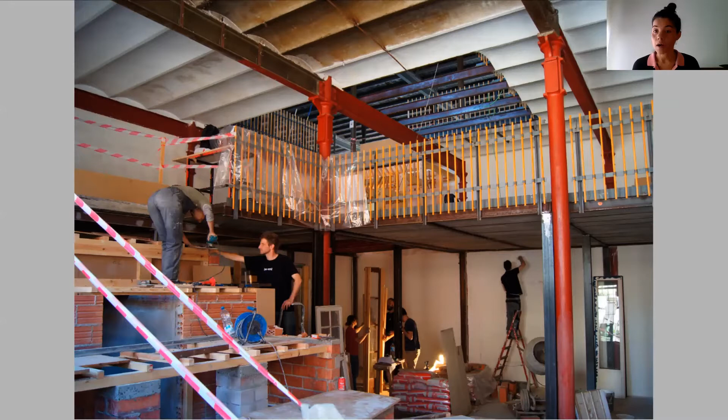So we, as part of the neighborhood, started transforming the different blocks. Can Batlló is basically a paradigmatic experience of bottom-up city transformation, where people with their hands, the materials around, the skills, self-built, in a way, communitary facilities, and started inhabiting these spaces with cultural activities, with a library and a kind of cafe and meeting point at the beginning.

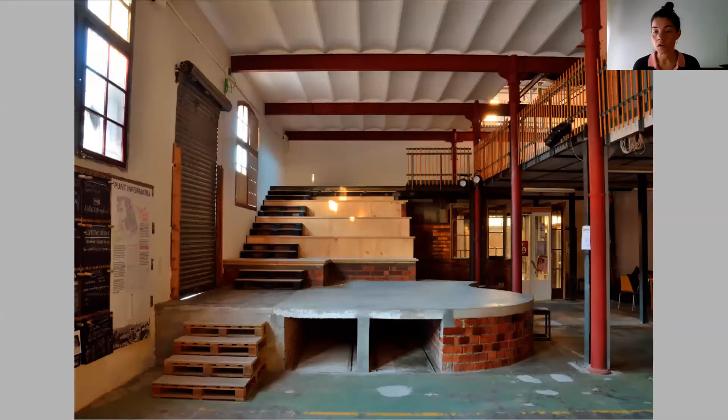So Can Batlló was for us a kind of starting point to understand how we can relate our practice with people, with participation. Can Batlló started to be transformed in 2011, with all the people using the spaces. From this first space, block 11, the activities continued inside the different blocks with agreement of the municipality, also outside with different kinds of public spaces.

But at a certain moment, we realized that we had so many people involved in Can Batlló. We had the skills from people who had been involved in different things, from carpentry to steel, etc., and also as architects. So it was a kind of combination of knowledge that made it easy to start thinking how to scale up these kinds of initiatives.

In that moment, we thought about how Can Batlló could become a real piece of the city, needing the complexity of users. In 2012, one year later, as an assembly of Can Batlló, we started to think how we can provide economical activities, how we can provide housing, because we were also in the middle of this crisis where housing was one of the main points. So from the assembly, different groups of people started to think up projects. One of them was an incubator of social economy, so how we can introduce new activities, like productive activities, again, in these industrial premises.

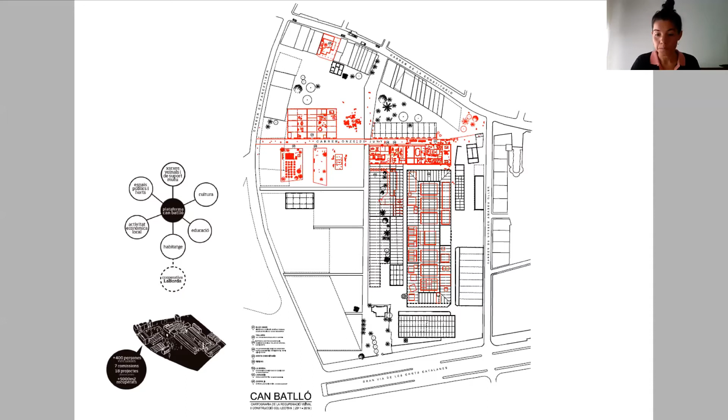So in this context, I think it's important to understand what is happening in Barcelona. Since the dictatorship in Spain, the main housing form, the housing tenancy that was promoted, was ownership.

It was also a way to control the society, to make it more conservative, and also to promote the economy related to construction.

That's why many years ago, where we are now, Barcelona is the city with the highest percentage of rent, but it's in any way also really low. So Barcelona has 65% ownership and 35% other kinds of tenancies, especially rent.

But the main point is that only 2% of the housing stock is public. So that means the private market has total control, and that's why there are no mechanisms to control the prices.

Before 2008, before the crisis, the prices started to grow and increase extremely, and just two years ago we were again in another bubble.

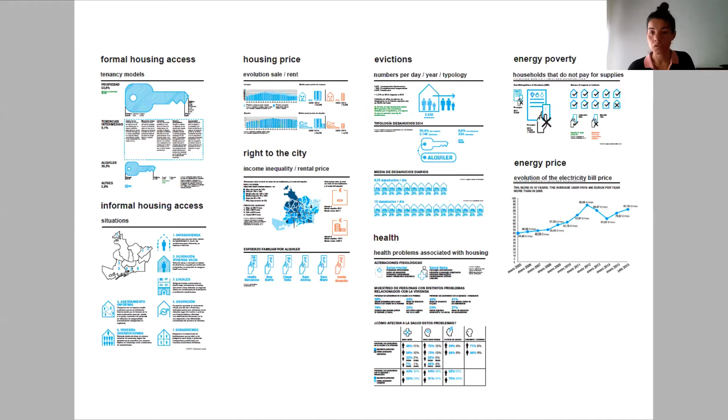In that sense, what we understood as cooperative housing is basically a model we saw in preliminary studies from Uruguay, for example, or even Denmark. We also know it's present in Canada, the States, other South American countries, Germany, probably Australia. So in a way, it's a model which is not really known, but it's present in different countries all over the world.

Our framework was defined basically as a non-speculative model, which helps to define this blocked housing stock, which cannot be absorbed by the real estate market and cannot increase the monthly cost. So it's collectively owned, and this is the mechanism that also locks out speculation.

Because it's a non-profit model, it's affordable monthly quotes, because you don't have to produce benefit itself. Basically this model wants to cover the cost of construction, the cost of maintenance, and to produce a kind of solidarity box, but that's all.

Basically the cooperative is the owner of the building, and the cooperative establishes a contract of right of use to the individuals who are going to live in each of the units, in each of the housing. And you are able to live in the cooperative for your entire life.

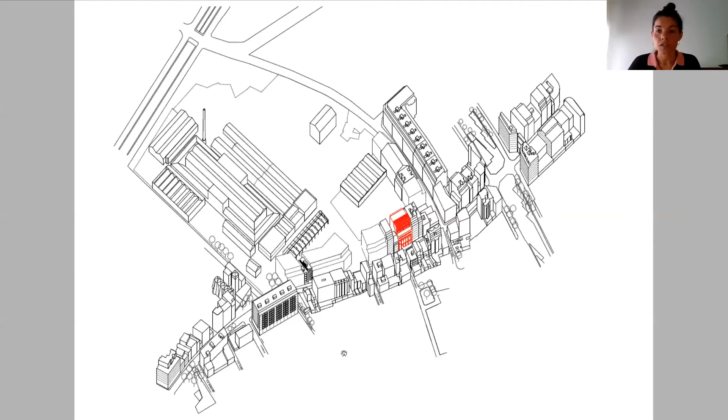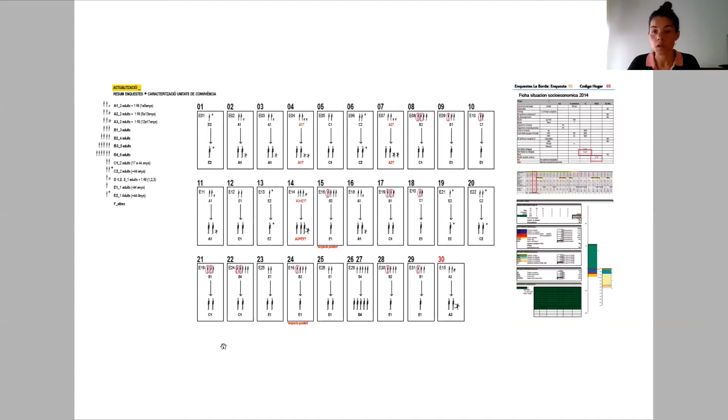So the first phase of the project was interviewing all the people who were in the assembly. We made this kind of survey, this interview, to really know the profile of the people. This was through asking about the family structure, the incomes, the mobility dynamics, about their current housing access, also about energy demand and energy consumption.

A lot of information also allowed people to be really aware about where they were living, how they were living, the cost of living, and also about energy poverty. Some of them were in energy poverty without knowing it. So in a way, the process of definition is also a process of empowerment and acknowledgement.

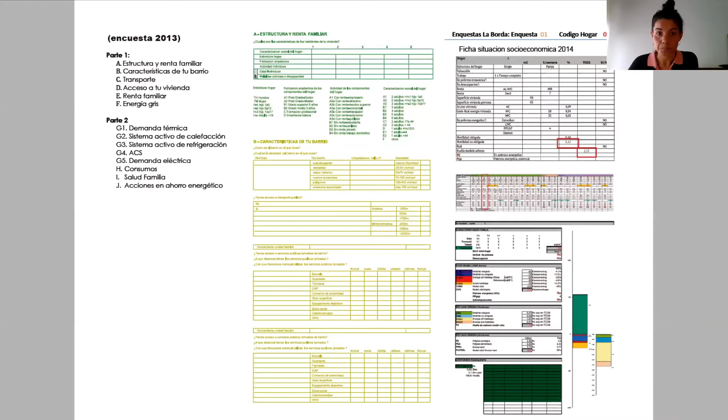So here was a kind of radiography of the group, basically we selected some of the main outcomes. On one hand, we had a really diverse composition of the group, which is also a mirror of society. This idea of the conventional family prototype with 2 adults and 2 kids, for example, is not present at all anymore in Barcelona or even in the group.

There were a lot of single people, which also shows we are more atomized, more individualized as a society. There are more couples, mothers or fathers with kids, and also units of cohabitation, meaning different adults living together. That makes us realize we need a really flexible infrastructure and different typologies of housing.

On the other hand, almost 50% of the people in their previous houses were paying a lot, more than 50% of their incomes, through housing. So the idea of reducing the cost of construction, to make La Borda more affordable, was essential, and making it really passive to understand how we can reduce the energy consumption.

Because in their previous houses they were suffering energy poverty, as they had to pay so much for the house that they could not assume the heating system, for example. And the last was about mobility. In Barcelona it was compulsory to build parking, which we were also challenging in this regulation.

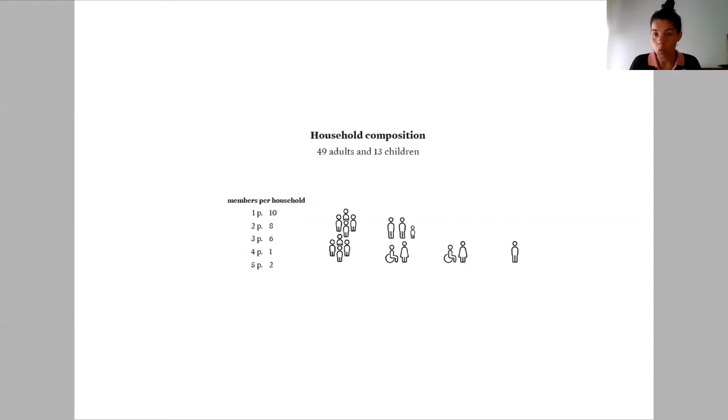From 10 units, some are from 1 person, some from 2 people. We can see like only 1 unit is a kind of conventional family of 4 people, like 2 adults and 2 kids. So in this idea, diversity is really present.

One of the main goals of La Borda was also to enhance community living. So how can we, in a way, rethink the program of collective housing? We understood that we cannot reduce the number of units, so we have to redefine what we can take out from the units and make it common.

Finally, we had 280 square meters of community areas, which is more or less 10 square meters per unit. Basically, this came as a process of understanding which kind of social dynamics we were to make common.

How daily practices can be a radical tool for social transformation, taking into account, for example, gender issues, how a collective kitchen can promote an equal share of household tasks, for example the kitchen tasks. Reflections and discussions like that were really present.

So in a way, we started thinking about the different kinds of activities we realize at home, which means a home is more than a shelter - a series of spaces to care for the body, just for storage, etc. As a community, which is our conviviality model, we asked what we want to share: the energy supply, the mobility, the economy, healthcare.

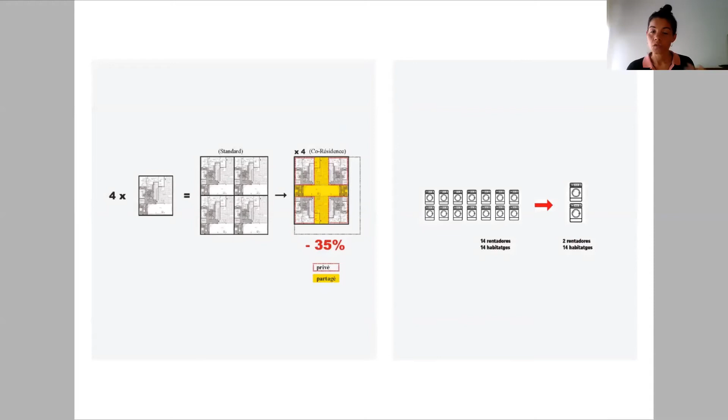So also, for us, it was a response to be more sustainable in terms of environmental aspects. This idea to reduce the surface of construction, to collectivize infrastructure, to decide which are the needs - where they're going to be developed through this participatory process.

Finally, we managed to decide that we had this kitchen and dining room, the co-working - more than a co-working, it's a commercial area which is a cooperative for consuming vegetables and organic food, etc. A multi-purpose room, the laundry, a guest room, a health area, and outdoor or semi-outdoor spaces like a courtyard, bike parking, terraces, storage.

As I said, we proposed to the municipality to change the regulations, and I think this was a victory - that through this kind of process we can challenge the current regulations and provide frameworks for other developments to be built with these new regulations.

We collectively decided the environmental goals - how we can reduce energy consumption, water, materials - as much as possible within our budget, which was already quite low.

Basically, the project was placed in between these two existing buildings, with a south facade, which is the best facade in our context to capture the sun, to get the sun's energy as much as possible.

This internal courtyard is a kind of space for the community to meet, to see, to circulate, and to enhance interaction. It also functions as a collective energy saving strategy—through a greenhouse it keeps the sun's energy inside and makes the whole volume more compact, reducing the external facades which are more exposed to the climate, to the rain, etc.

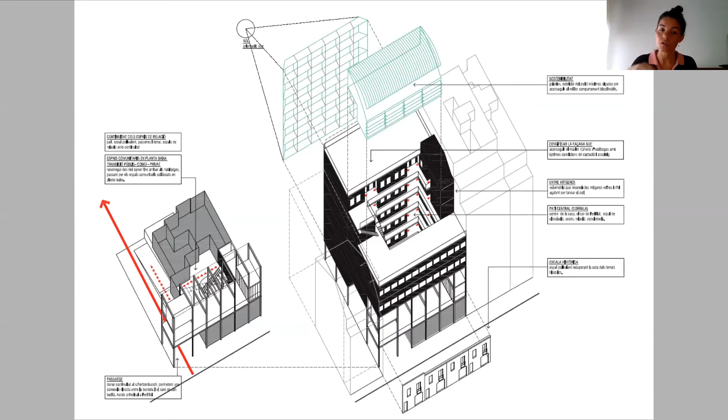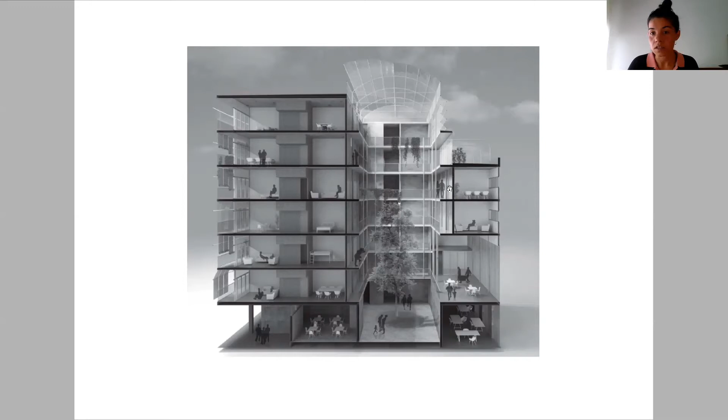So these transitions and spaces of interaction and the passive strategies were the most important in the design—making this dense block on the south facade, this courtyard in the middle which also keeps the energy, and finally the ground floor with the common areas and only 4 units on the north facade, but in the highest spaces.

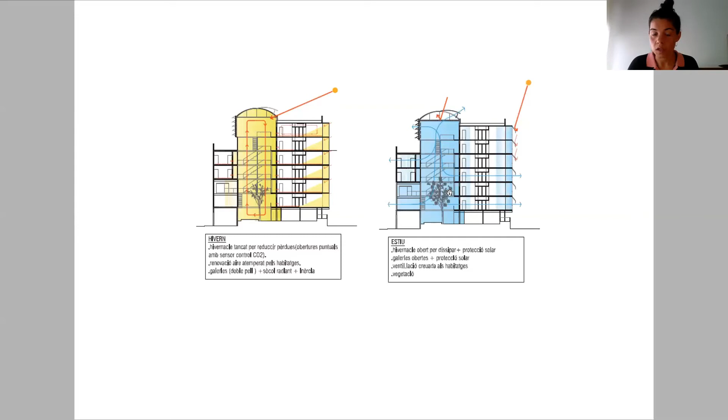Here is the behavior in summer and in winter, with the greenhouse closed or open, with cross ventilation. And this is the different workshops used to define the housing typologies.

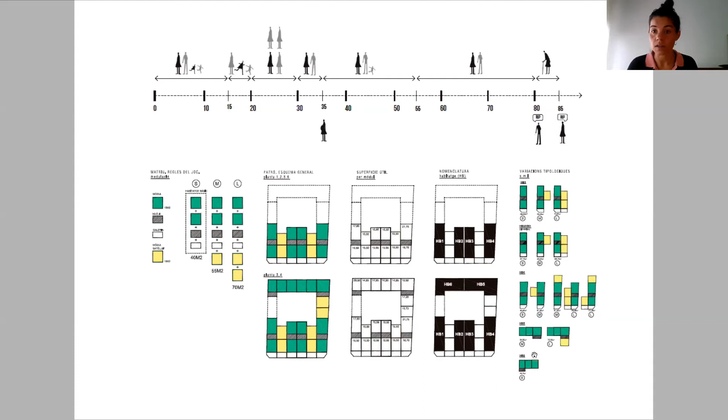After understanding each of the needs, basically we defined a kind of open infrastructure of rooms, of units that can be changed through the life span of the cooperative and the units, and can be connected, having several typologies for different unit compositions.

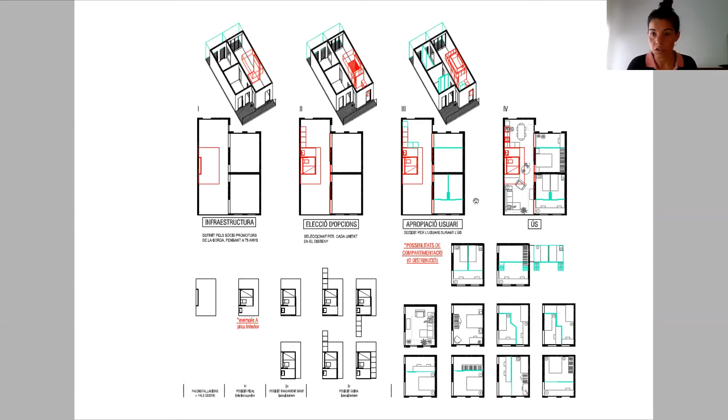This was also developed in terms of participation with an infrastructure that is kind of naked, where each unit can define the kitchen and the position of the access to the bathroom, and then during the living they can build different kinds of divisions and internal partitions to adjust their needs. So this was also participation just to define it.

And once everyone was distributed in the building, we had this kind of image of a puzzle—different kinds of compositions and typologies in each of the floor plans.

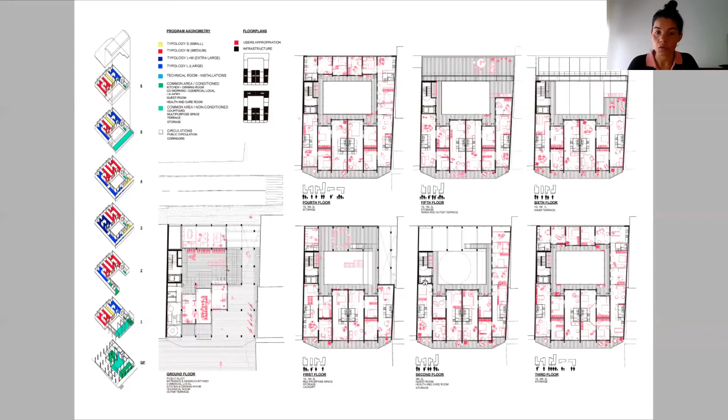So this is the ground floor with this public passage connecting from the neighborhood to the park, the kitchen in the ground floor, and this kind of commercial activity place.

And here we can see how this courtyard with the circulations and common areas, kind of the lobby, is combined with the units, and how each unit functions differently because it's a really open space with no hierarchy, allowing people to live in these spaces very differently.

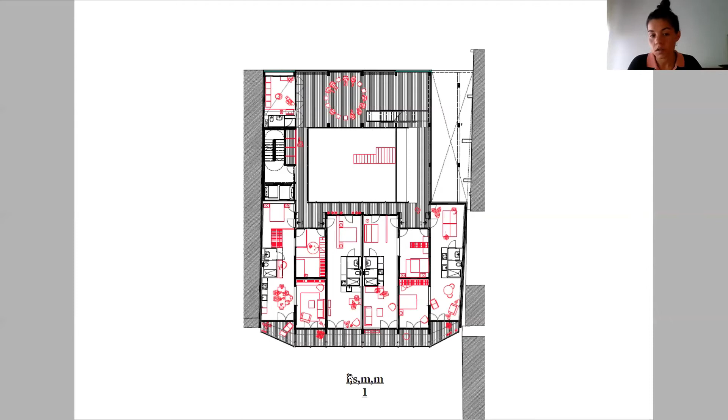For example, in this first floor we have an L unit, the biggest one, a small one, and 2 medium sizes—but this composition changes across the different floors.

And just to finish about the design decisions regarding environmental impact, it was important for the cooperative to also be a pioneer in terms of materiality. After studying different scenarios, we decided collectively to build in wood—CLT, cross-laminated timber—which was the most sustainable material.

And although it was somewhat expensive, we managed with a low budget because we could reduce the layerings and reduce the insulation, etc. So basically we had the ground floor in concrete, and all the distributions in the houses were already in the structure—so in a way, the main infrastructure was already defined by the structure itself.

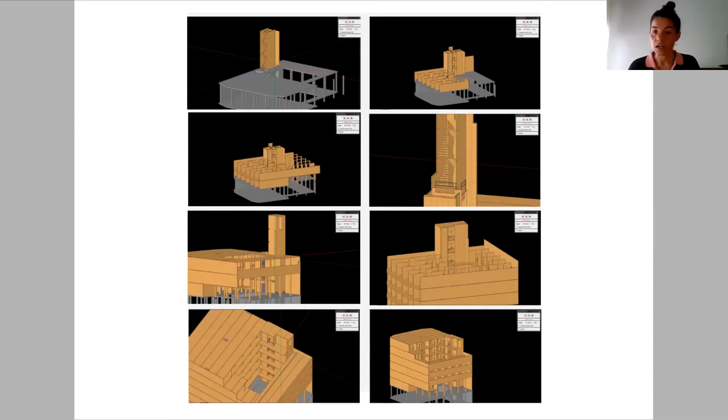As we can see here, in 6 weeks we already built this six-floor building, and the main infrastructure was totally linked to the structure.

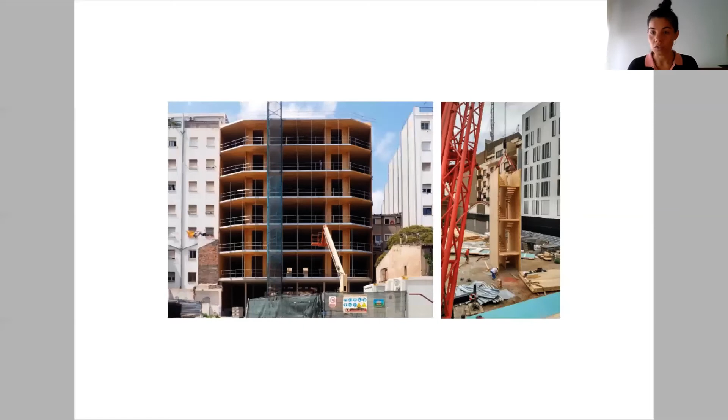Also during the construction, people were visiting the building to really understand how it was going to be built, which was also important for the future maintenance of it, the different kinds of layerings.

We also introduced a bit of self-construction, self-build, in order to reduce the budget, but also to use the waste of the structure to build one of the floors from the ground floor.

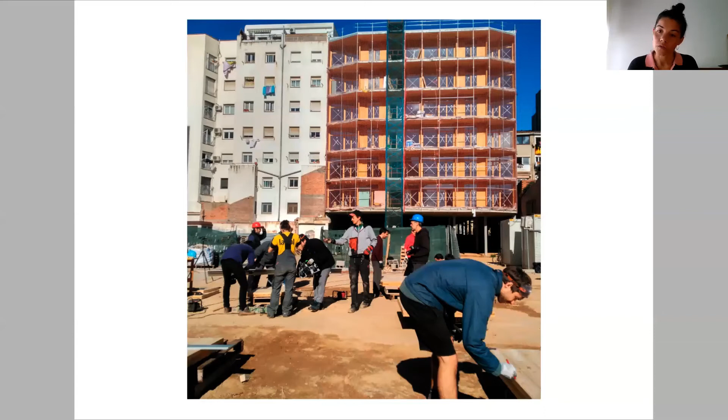So here are some pictures with the building already finished. And I will start, just really briefly, the last 2 blocks.

These are images from this appropriation—it was a really naked infrastructure because of the budget. It's difficult to understand sometimes in different countries with different construction rates, but basically we built at 850 euros per square meter, which for a passive, highly environmentally performant building in wood structure is really, really low.

So basically this was because we prioritized the main infrastructure, like the facades, the quality of the windows, etc., and the installations, but the rest was totally unfinished.

So the people took a really important role to define and to appropriate it. So even today, the laundry is still to build as a box, but the users started. The walls were painted by the people. The units, in a way, were partly finished by the users in order to make it more their own. So this was the main infrastructure.

So on these walls of wood, these spaces just connected to make different uses for the people, and then to see how people are customizing their own flats, making each one really different from another. It was also really beautiful to see how all these infrastructures were used, especially for the kids, and how people feel really comfortable using all the common areas of the building. Each point, each corner was totally used by the people.

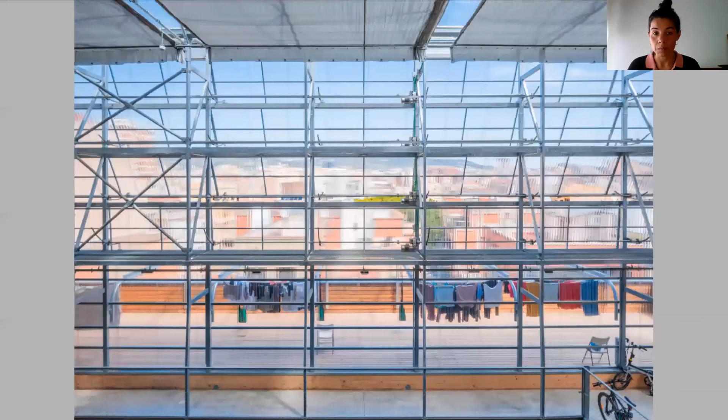And here we can see how the flowers are starting to colonize the different spaces. Gatherings and different meetings were happening, showing how these non-hierarchical spaces, these really open spaces, allow many different activities to be developed.

And the rear facade, the south facade, also with this sun protection, which changed a lot the depth of the facade, and this ground floor with the passage and the shop already open, and how life is seen through this polycarbonate.

And just to finish, I'll have 5 more minutes maybe. I think it's more or less what we said. It's important to understand how many of the decisions we took during the process had in mind that we had the people deciding with us, and that we were also able to monitor and make a lot of pedagogy about the environment, about the behavior of the building.

And in that sense, once the people moved there, we did many workshops on how to use the building, because a really passive building needs a really active inhabitant. So we explained the different mechanisms, how during summer or winter they had to move the sun protections, activate the ventilation or microventilation of the windows, the heating system, etc.

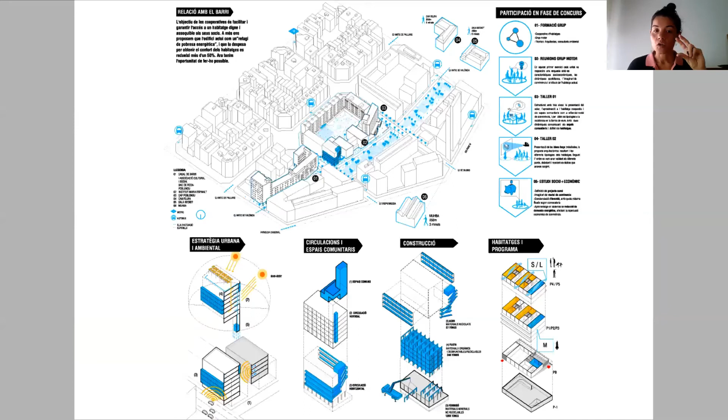So we had the opportunity to work with a group, and we won the competition for one of the plots, and we started this process of revising and redefining it in a second way with a second group on a second plot. But it was interesting because many of the main strategies about environmental issues, how the surroundings affect the building, were really present, and we could readjust some points from the previous infrastructure, while also having really open spaces in this second project.

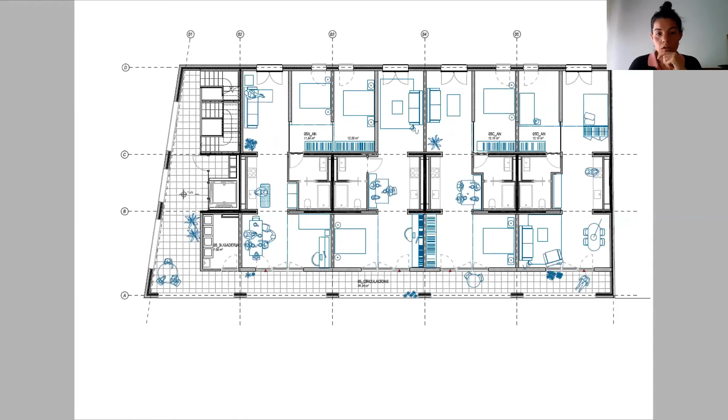And we also took into account what we learned about the wood structure, about many of the collective devices that we introduced in La Borda, in this new space. This is a really small block where we wanted, but we didn't have, for example, a courtyard.

So basically we took outside all the spaces of circulation, all the spaces of interaction, and we put them as terraces, all the circulations and collective spaces in the corner of the building to make it more visible. And here we can see how all this public space, these public parts of the building, are really public and visible.

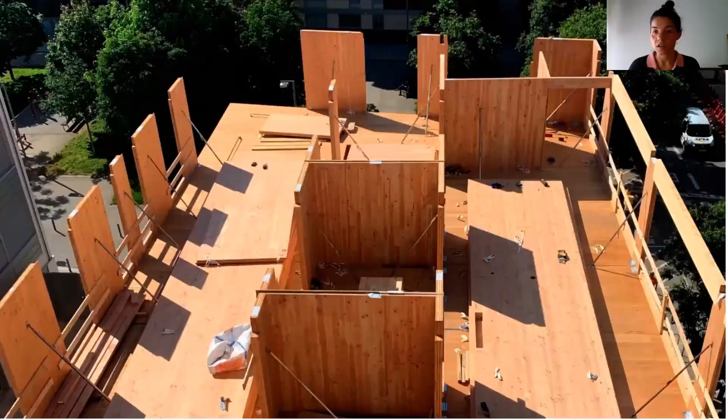Also, this kind of infrastructure where the wood is defining the main spaces of the building, and also the ability that it changed through time, which is essential in this kind of organic process and the community.

And also how these terraces and circulation spaces are going to have the best qualities in terms of visual and sun capture, which in the end makes the less-used spaces, which could be a stair or a corridor in the conventional housing market, suddenly become the more privileged areas of the cooperative.

So in a way we are challenging this culture of ownership, individual ownership, but we are now providing, as architects, tools for municipalities and for new groups to scale up the model, systematizing the process we developed with the first and second experiences, but also understanding how this can be applied not only in public plots as until the moment.